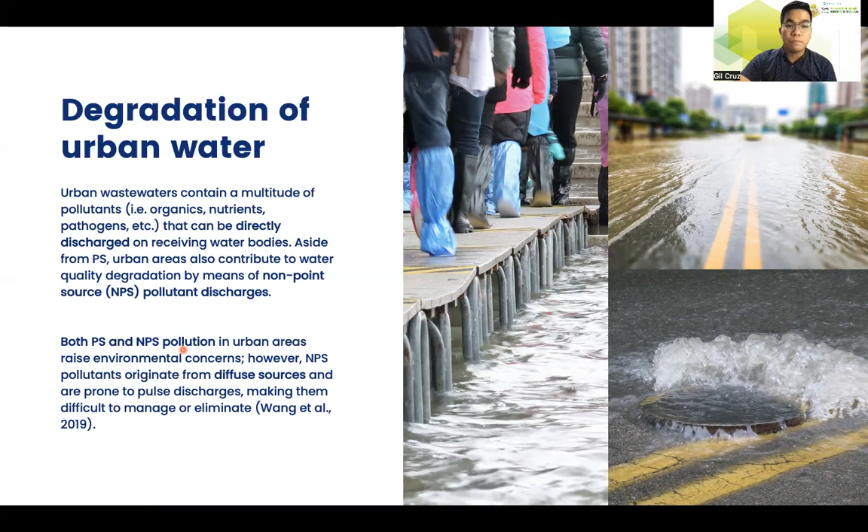Moreover, urban stormwater runoff usually exhibits the first flush effect, wherein the discharge in the initial stage of a runoff event contains considerably higher amount of pollutants as compared with the latter phase of the event. The first flush phenomenon can be classified as a concentration first flush or mass first flush. A concentration first flush mainly deals with the concentration of pollutants, whereas a mass first flush is a phenomenon that is both concentration and flow dependent.

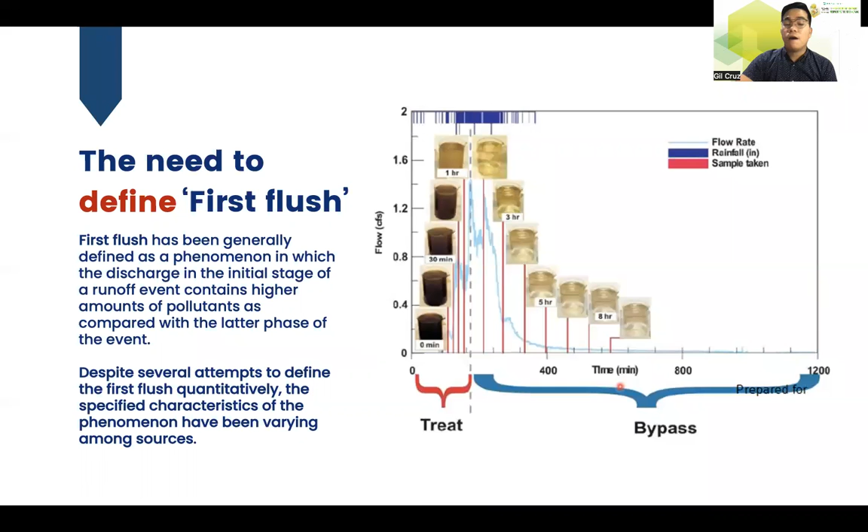First flush also has been generally defined as a phenomenon in which the discharge in the initial stage of a runoff event contains higher amounts of pollutants as compared with the latter phase of the event. But despite several attempts to define the first flush quantitatively, the specified characteristics of this phenomenon have been varying among various sources. Hence, the general objective of this comprehensive review paper is to analyze the water quality of first flush in urban stormwater runoff for low-impact development design.

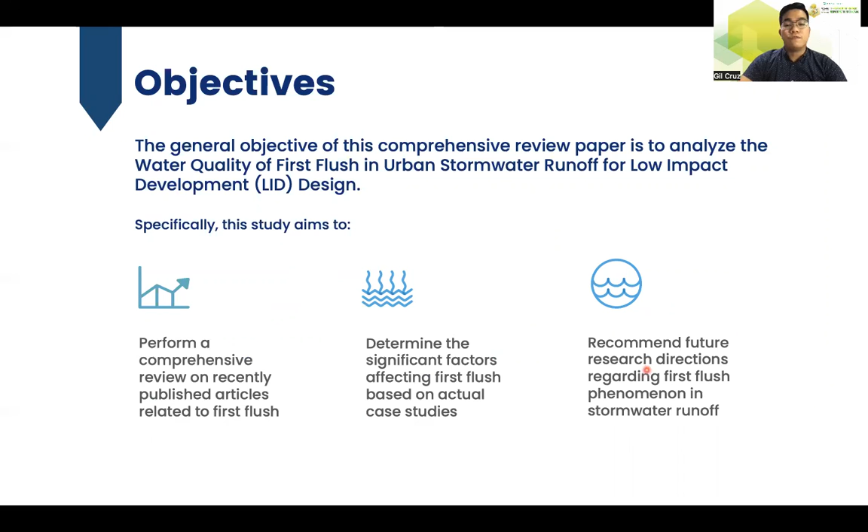Specifically, the study aims to, first, perform a comprehensive review on recently published articles related to first flush. Second, to determine the significant factors affecting first flush based on actual case studies. And lastly, recommend future research directions regarding first flush phenomenon in urban stormwater runoff. Due to the large number of publications regarding the first flush phenomena, it is necessary to synthesize all currently available information and published literature to direct future studies and research initiatives.

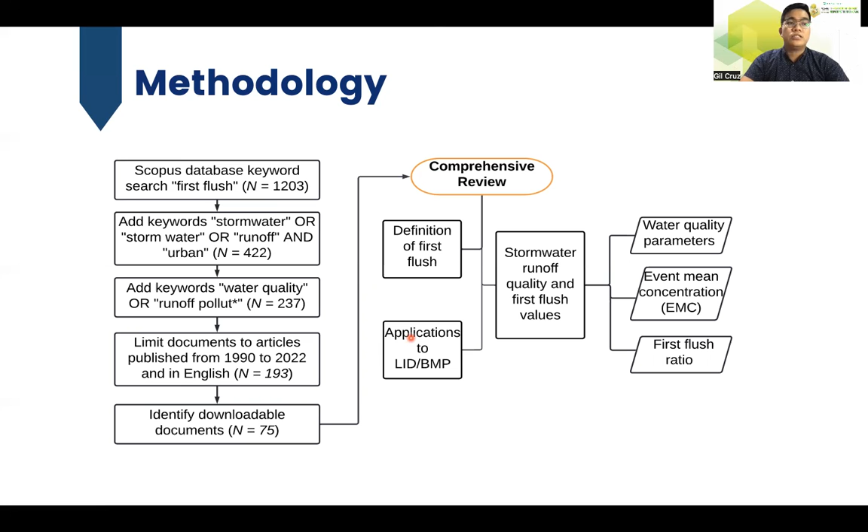Therefore, as part of the methodology of this comprehensive review study, a more comprehensive study was conducted to determine the significant characteristics of first flush, particularly its water quality, and the factors affecting the occurrence and magnitude of the phenomena in urban stormwater runoff. More so, in this comprehensive review, the definition of first flush from different sources, the first flush values obtained in the studies, and the applications of first flush for the management of stormwater were summarized and then analyzed. And the results of this comprehensive study were also used to identify future research directions regarding first flush phenomena in stormwater runoff.

So, one of the goals is to have a clear definition of first flush. For instance, one interesting observation of this study was a vast difference in the quantitative description of first flush phenomena. For example, according to an article by Geiger in 1987, the occurrence of first flush can be confirmed when the slope of the cumulative pollutant mass fraction versus the cumulative volume fraction is greater than 45 degrees.

Meanwhile, Deletic in 1998 introduced the 40/20 ratio, stating that first flush can be observed when more than 40% of the cumulative pollutant load was transported within the first 20% of the cumulative runoff volume. Meanwhile, a separate study also claimed that they devised the 80/20 ratio as a criterion for evaluating first flush. This ratio suggested that a significant first flush occurred when more than 80% of the total pollutant mass was transported within the first 30% of the runoff volume.

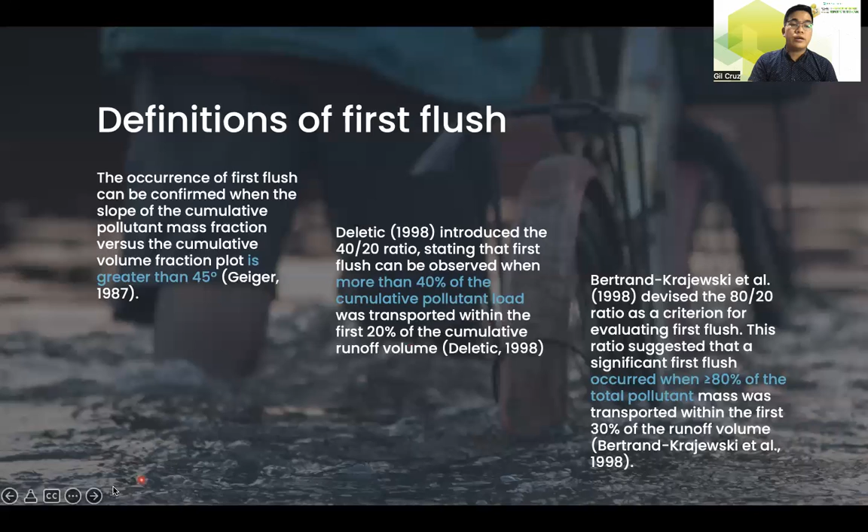Moreover, a more recent study conducted by Kayhanian and Stenstrom in 2020 proposed a mass first flush ratio definition sketch in which the mass first flush for any constituent based on a selected normalized cumulative mass and runoff volume can be determined as high mass, medium mass, low mass, or no mass first flush.

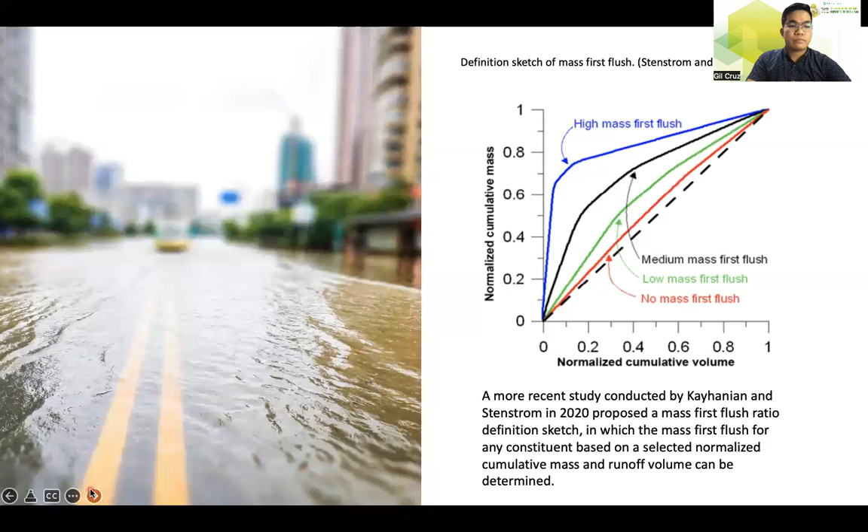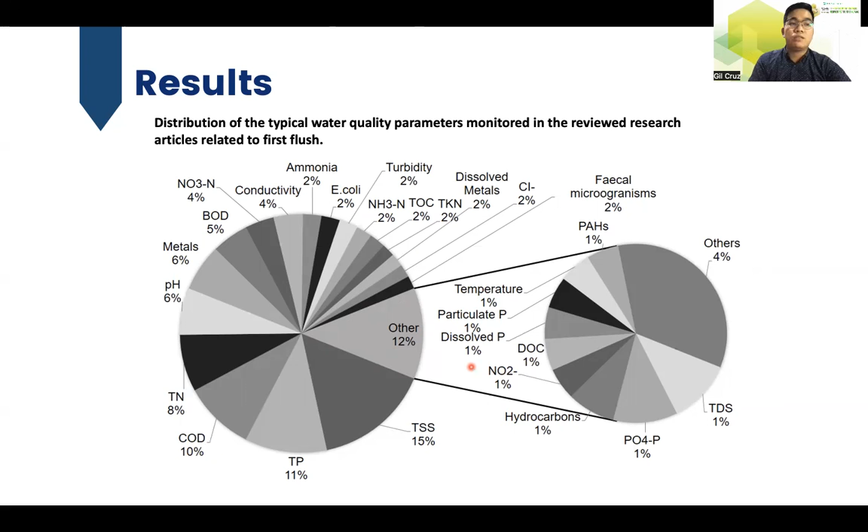This figure shows the typical water quality parameters monitored and analyzed in stormwater runoff and first flush studies. Among the water quality parameters, the most typically monitored include total suspended solids, pH, heavy metals, and biological or biochemical oxygen demand or BOD, that appeared in more than half of the reviewed articles. Among the reported studies also, it was found that TSS was often the primary water quality parameter analyzed due to the simplicity in the analytical method and its association with other particulate matter and sediment wash off by stormwater runoff.

Several studies have been carried out also to examine land use types to stormwater runoff pollution characteristics. For instance, it was confirmed that a rapidly urbanizing catchment area may result in significant spatial distribution or variations of runoff pollution, which can eventually increase the difficulties to manage the overall quality of the stormwater. Due to the extreme variability in pollutant load throughout a given stormwater event, the EMC were found to be high, particularly in residential, commercial, industrial, mixed residential, commercial, and agricultural land uses.

The high EMC values for TSS were attributed to potential pollution sources such as atmospheric dry and wet deposition, road-deposited sediments, and vehicle emissions. Meanwhile, high EMC values were recorded mostly in residential and mixed residential commercial land uses where combined sewer overflow or CSO is present.

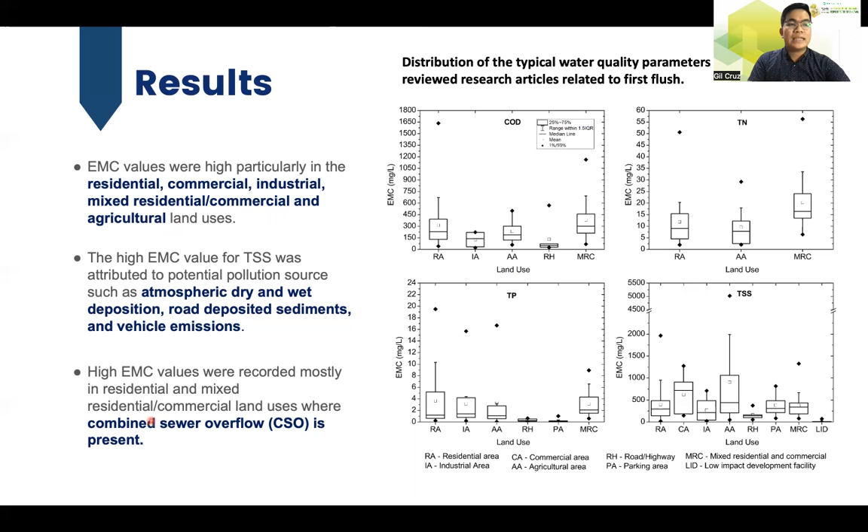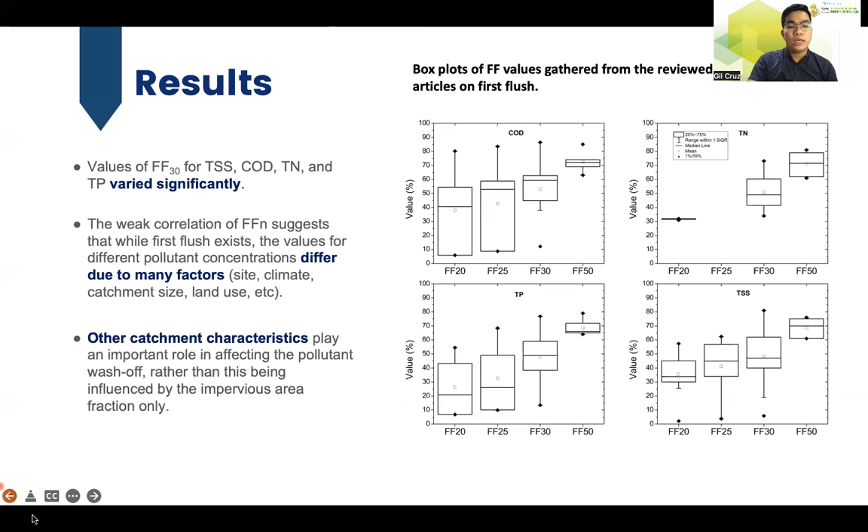We can see that first flush plays an integral role in the design of best management practices, BMPs, or low impact development. The BMPs and LID technologies discussed in these studies include bioretention, infiltration trench, and permeable pavement.

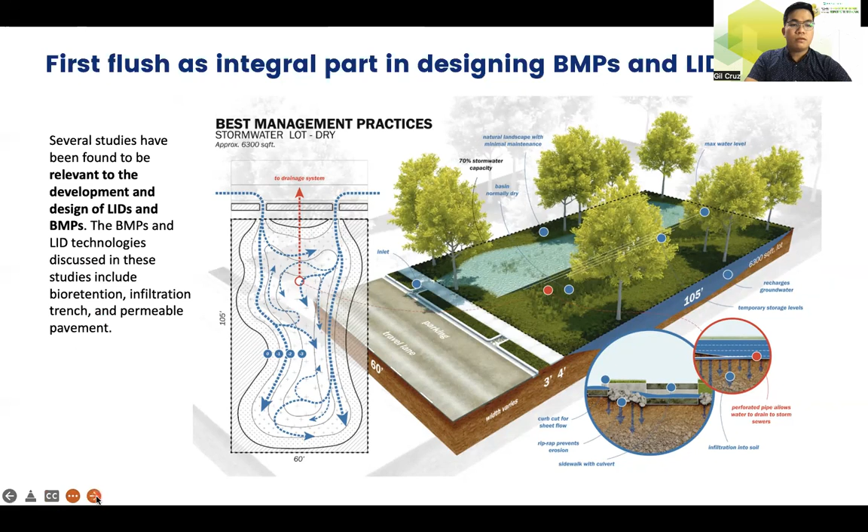What are the key highlights of various case studies reviewed in this paper? For instance, it was recommended by Lee et al. in 2010 that to be able to design the BMP as economically and effectively as possible, using the average rainfall depth was unnecessary, and it would be best to design BMP according to the 7.5 mm rainfall as lower limit. Meanwhile, Zhao et al. in 2018 highlighted that LID practices could influence the urban sediment, dynamic buildup processes, wash-off, and transport processes. Another study also highlighted that continuous monitoring results indicated that the first 4 hours of runoff exhibited higher concentration than normal levels at the study site, which could be useful in determining the necessary volume for efficient runoff treatment.

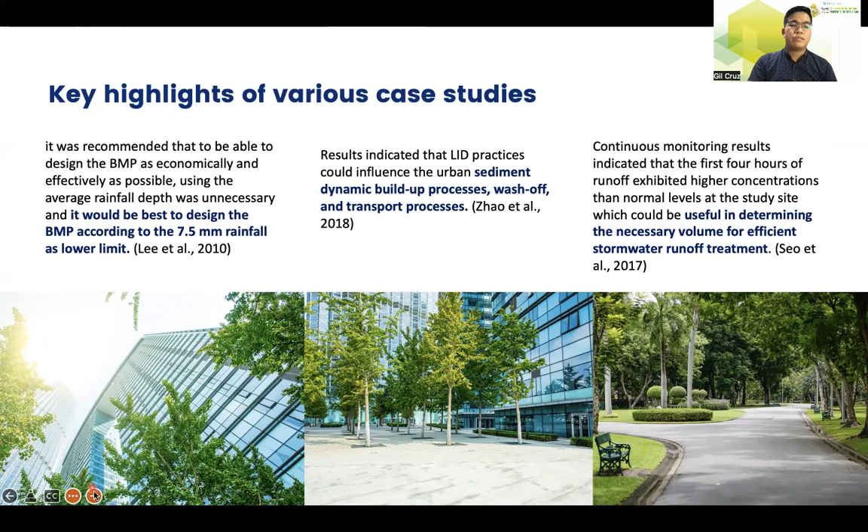In conclusion, the comprehensive review paper has identified the differences in quantitative definition of first flush among several sources. In a most recent study, Kayhanian and Stenstrom proposed a mass first flush ratio definition sketch to clearly define first flush phenomenon. More so, the generated box plot of various first flush values shows that in reviewed studies, a huge percentage of the cumulative pollutant mass was present in the initial 20%, 25%, and 30% of the cumulative runoff volume, indicating the occurrence of first flush. It was also revealed in this study that the characteristics of first flush extremely vary depending on the geographical location of the site, climatic conditions, and the pollutants being quantified.

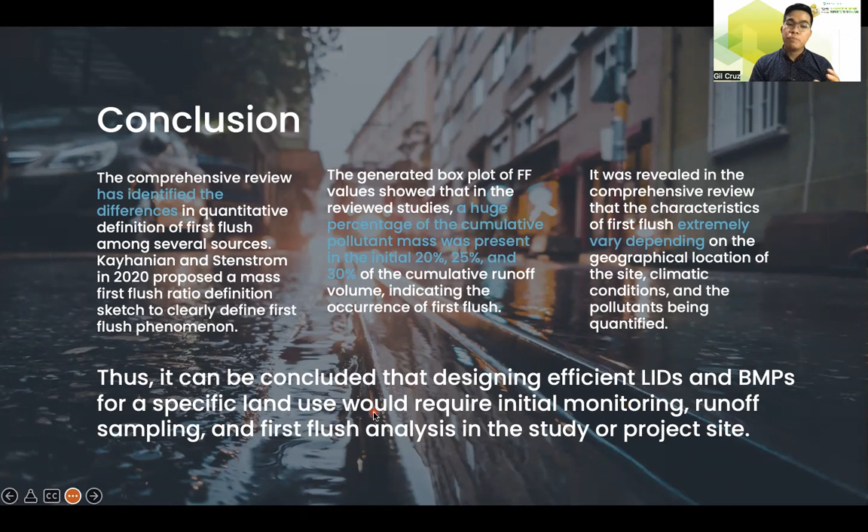Thus, it can be concluded that designing efficient LIDs and BMPs for a specific land use would require initial monitoring, runoff sampling, and first flush analysis in a study or project site. For future direction, a set of guidelines on the characteristics of first flush in different locations is seen as a potential major contribution to the development of land use specific stormwater management techniques, which can be beneficial to the improvement of water quality in different regions across the globe.